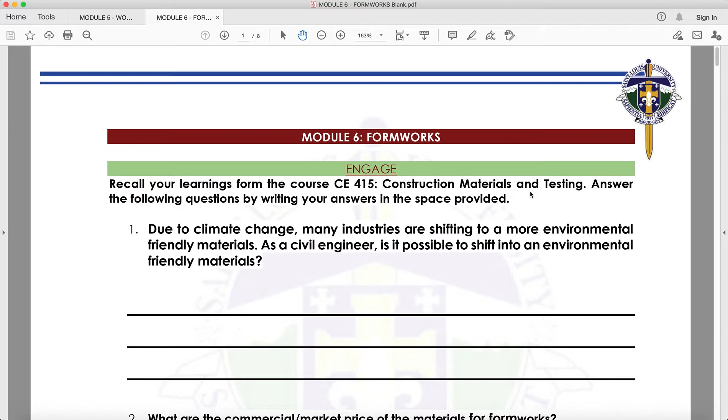So for this video, we're going to discuss Formworks, okay? But before we proceed further with this discussion, I strongly suggest that you review your learnings from construction materials and testing with regards to wood, okay? So that you can have a deeper appreciation for our topic.

Okay, so what is Formworks? Formworks is a temporary boarding or sheathing to provide the desired shape and size of concrete mass. So when we say fresh concrete, it is very workable, or it does not have any shape yet. So with the help of Formworks, we can attain the desired shape and dimension of our concrete when it's already cured.

So Formworks therefore is a form of false work. When we say false work, it is a temporary structure which helps the permanent structure. So ano ibig sabihin nun? Your structural members like your footing, column, beam, slab are permanent structures. And before we can have this permanent structure, it will first become fresh concrete. So in order to attain its shape and dimension, we need the help of formworks to hold them in place, and to mold the concrete while it is curing.

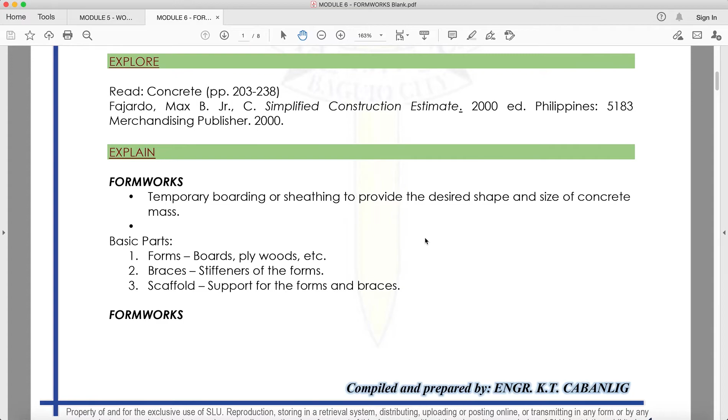So formworks is composed of the forms, braces, and scaffold. For the forms, we have the board, plywood, phenolic board. So ito yung board, this is the board, this one. It is the smooth surface that is being placed in front of the concrete face. So yan yung board.

Next would be the braces. Ito yan, horizontal, vertical, and we also have the diagonal braces. Though we don't have diagonal here, sometimes we use diagonal for braces. So what is the function of a brace? The function of the brace is to stiffen the board. Kasi kung board lang yan, if we do not have our bracing, then our formworks will explode. Puputok siya. Kasi hindi niya kayang i-counter yung force ng weight ng fresh concrete natin.

And next would be scaffolding. Scaffolding is to support the forms and braces. So this one is the scaffolding. It is the one that helps or supports our bracing.

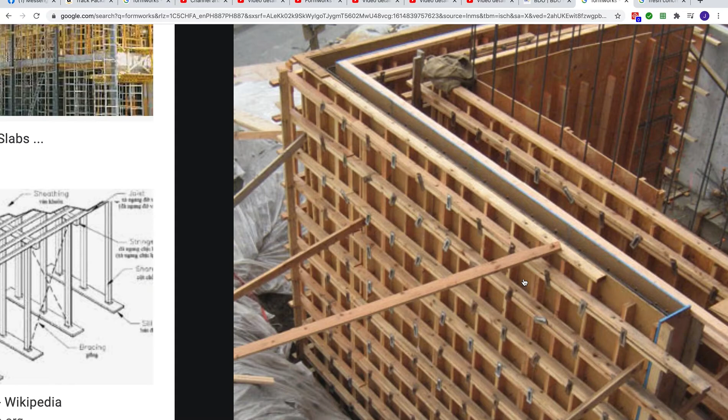So normally formworks are made of wood, the plywood, the lumber. But in modern practices, we are already using GI sheet and GI pipe in substitute for wood. Meron din tayong ginagamit na special type ng plastic to substitute our wood as formworks. One of the advantages of these materials is they are very much reusable compared to wood. But of course, in terms of pricing, mas mahal. But in terms of usage, mas matagal siyang magagamit, and it is for long-term usage. Other materials, gumagamit minsan ng fiberglass and so on. So that is formworks.

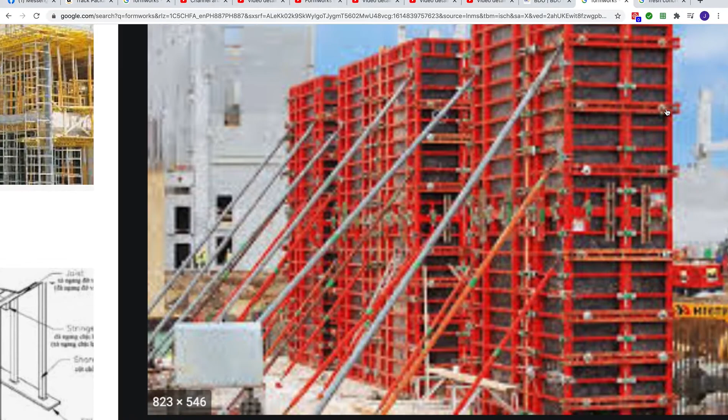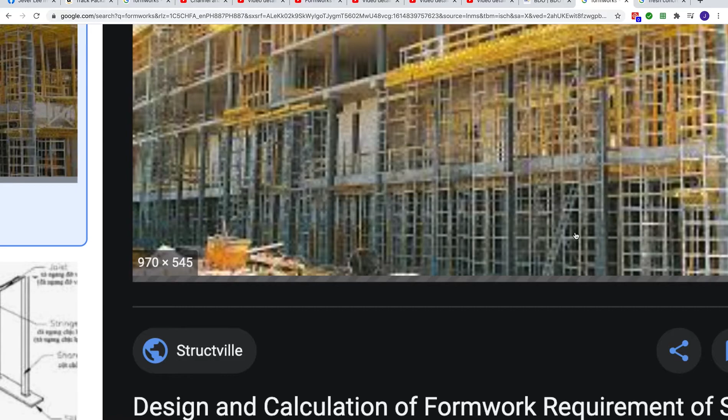So we have here other examples of formworks. You can see here, this one I think is phenolic board, but the bracing was made of GI pipe. Then these are your scaffolding. Likewise with this one, also your scaffolding.

For column, after 1 to 2 days of curing, pwede nang tanggalin yung ating forms. But for horizontal members, like the beam and the slab, we need at least 14 days or 2 weeks before natin tanggalin yung ating scaffolding or support, because it still cannot carry its own weight. We need at least 14 days of curing para mabuhat niya yung kanyang sariling weight. Unlike for column, 1 to 2 days of curing, pwede nang tanggalin. But you should not apply any load yet. So these are the examples of your scaffolding.

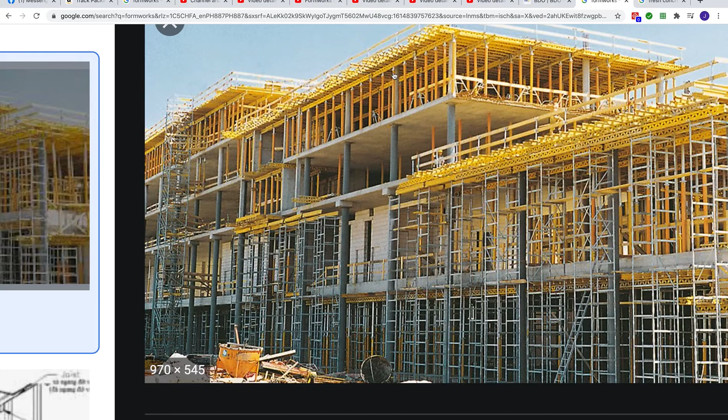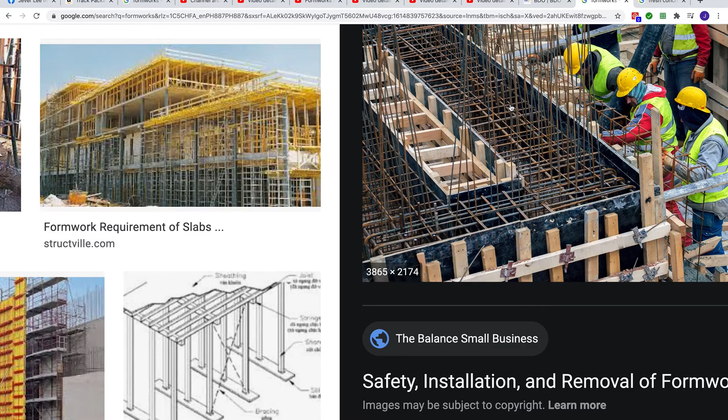So this one, you have here your formworks, formworks here, then formworks here, because the concrete is only on this part. So it helps us shape our concrete. Okay, so we can now proceed with our example.

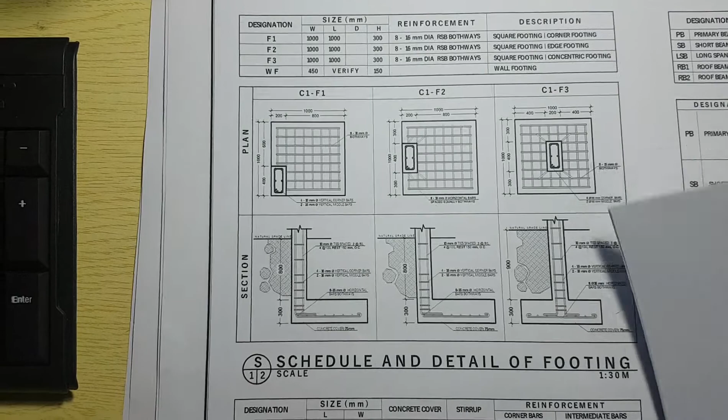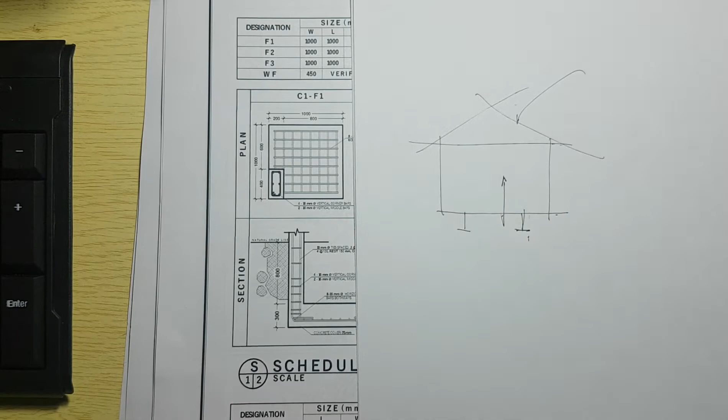In estimating, it is best if we start from bottom to top. When we design structures, what we do is design starting from the top, going down to the beam, to the column, to the footing. But when estimating, it is otherwise. We start from the bottom, then we go up. So for this one, we're going to start with footing.

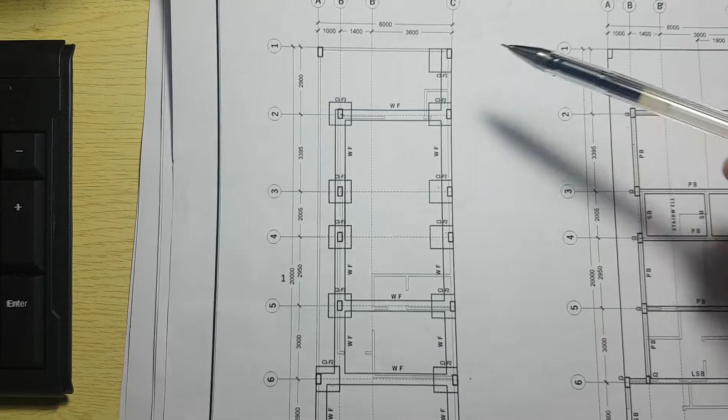So from the plan that I gave you, how many footings do we have? 1, 2, 3, up to 15. So we have 15 footing pads, all of which are 1 meter by 1 meter by 300. And the thickness of the footing pad is 300 mm. So it would look like this.

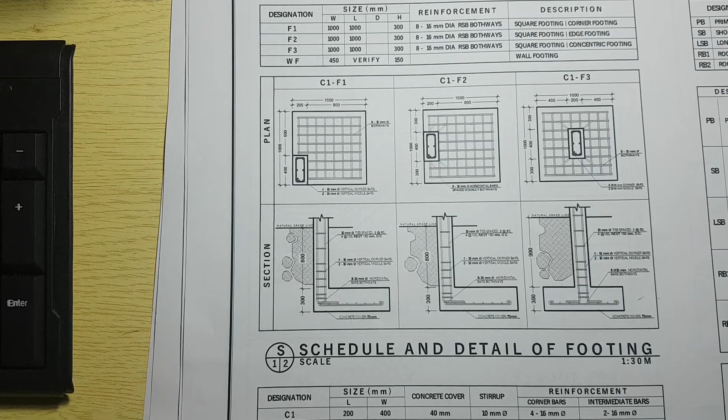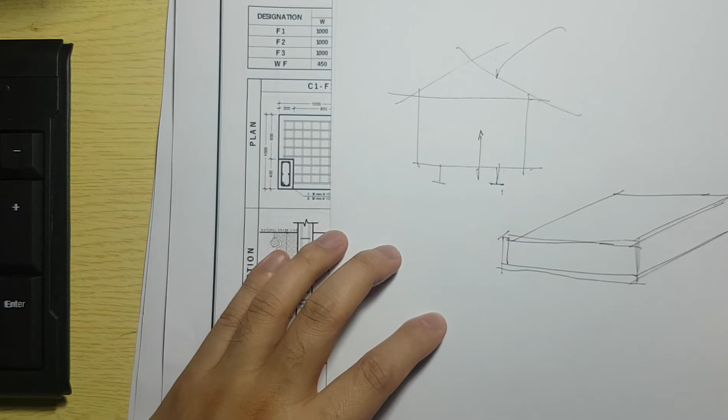So if this is my footing pad, ang mangyayari, lalagyan natin dito ng Formworks. So we are going to place Formworks here. It would look like this. We are going to enclose it, para siyang i-enclose in a box. So our footing would look like this one.

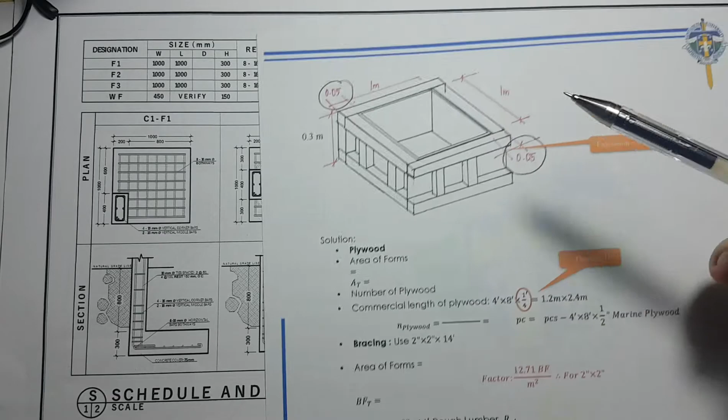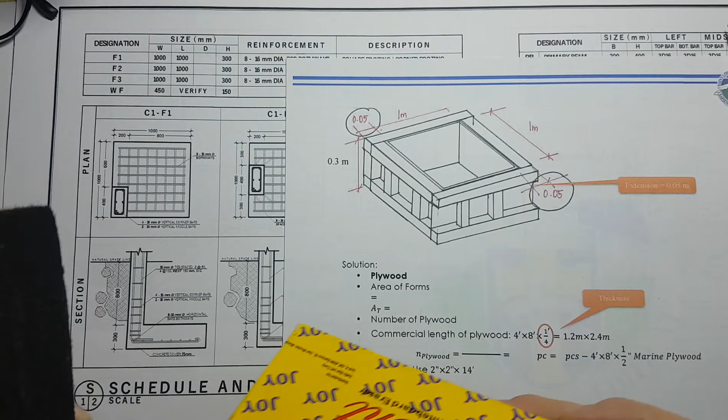Okay, so here we have, wait, let me just fix my... okay, so we have here the footing pad. So it is 1 meter by 1 meter, and it has a depth of 0.3 meters. So 0.3 meters, 1 meter by 1 meter. Now, what we need to estimate right now would be the formworks that would enclose our 1 by 1 by 0.3 meter footing pad. So, ang mangyayari niyan, dapat, it should not look like this.

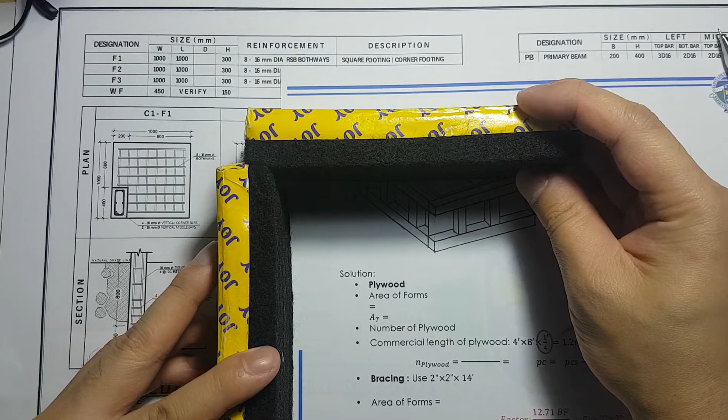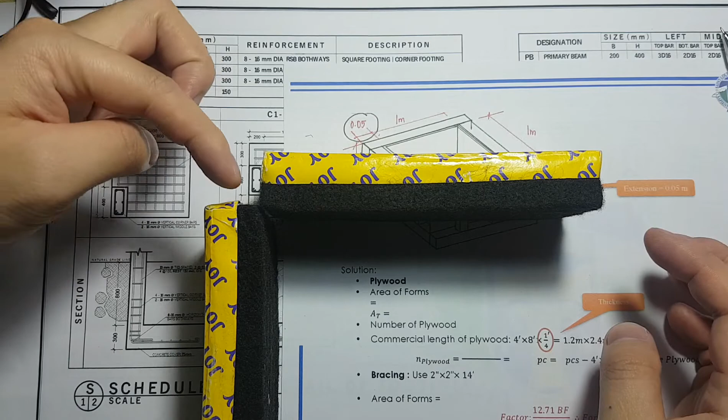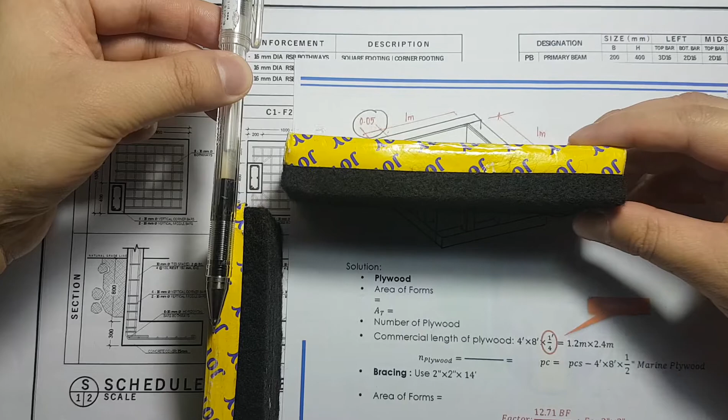Okay? This is the 1 meter, this is the 1 meter. So, what would happen is, one side would overlap the other. Because if we are going to enclose our footing by 1 by 1 only, wala tayong space, or we do not have anything na pagkakabitan natin. But if we are going to extend it, then we can nail our formworks here. Dito natin siya ikakabit. But if we are not going to extend, then there's no place where we can attach our formworks. Okay? So we are going to extend.

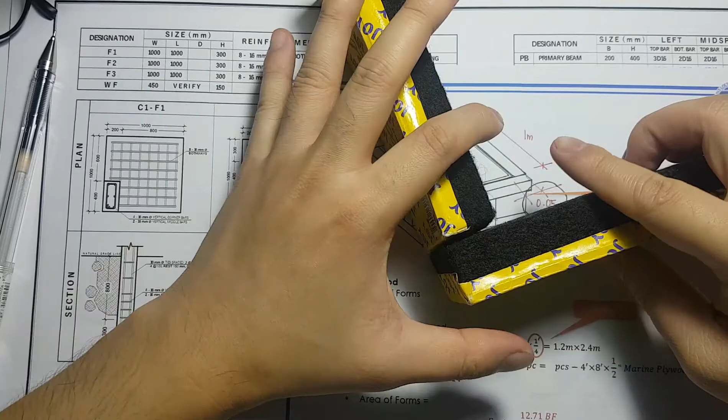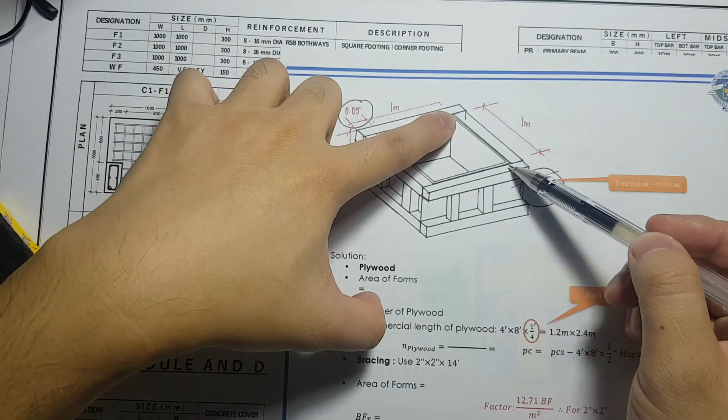So itsura niyan, this one yung nag-extend, itong nag-extend would be this one. Then yung nasa loob ng extension, ito is this one. Okay? So we have here our formworks. So the length or the area of our plywood would then become 1 meter by 0.3. So that would be 1 times 0.3 times 2 because we have two sides, diba? So there are two sides.

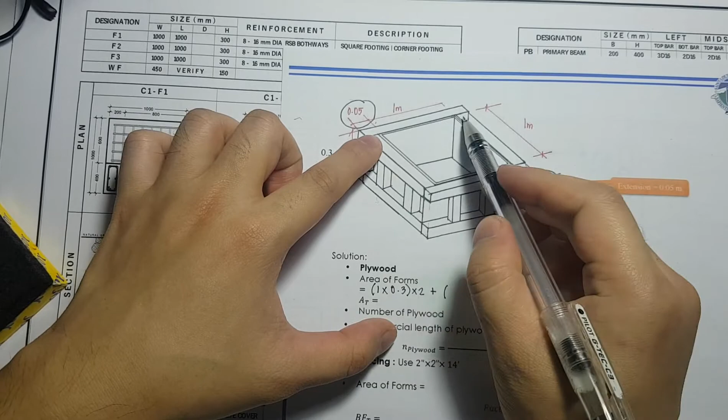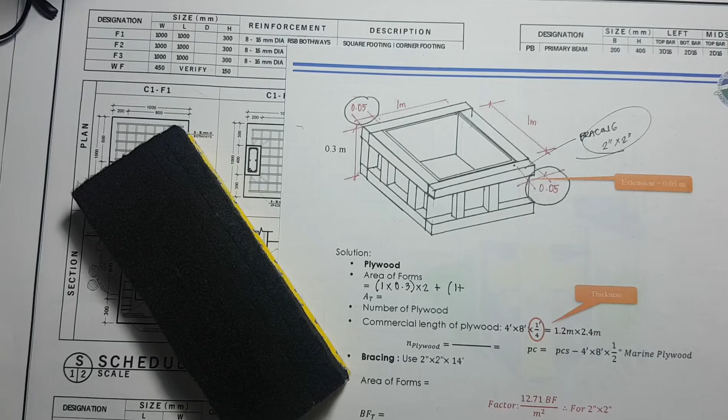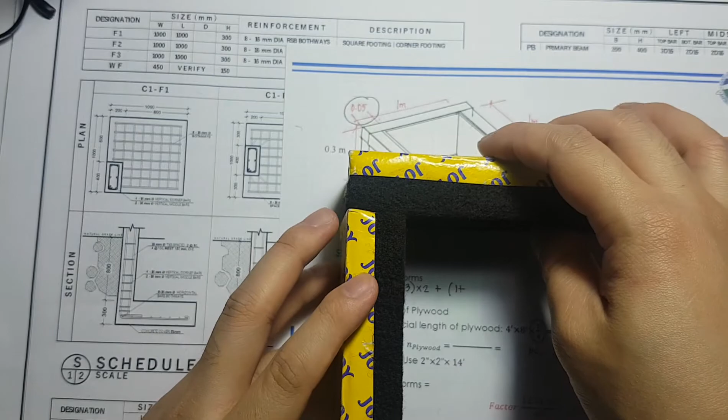Plus, this other one here, we have 1 plus an extension of, what would be the length of the extension? Take note, for bracing, what we normally use is a 2 by 2. So for bracing, we use 2" by 2" lang. This is the typical dimension that we use for bracing. So this dimension here is 2" and the dimension also here is 2". So if there would be an extension, it would only be 0.05. And on the other side, it would also be 0.05.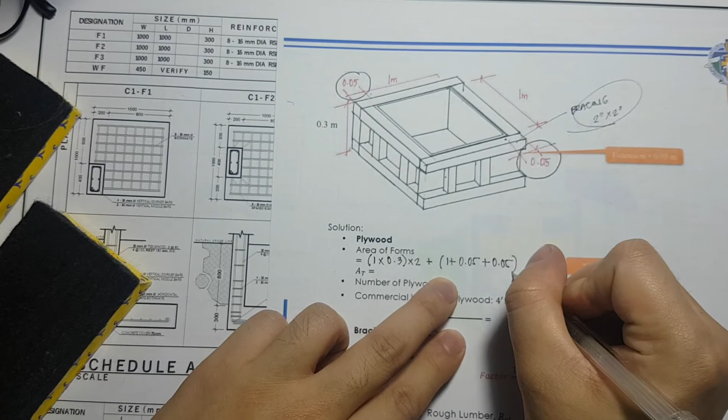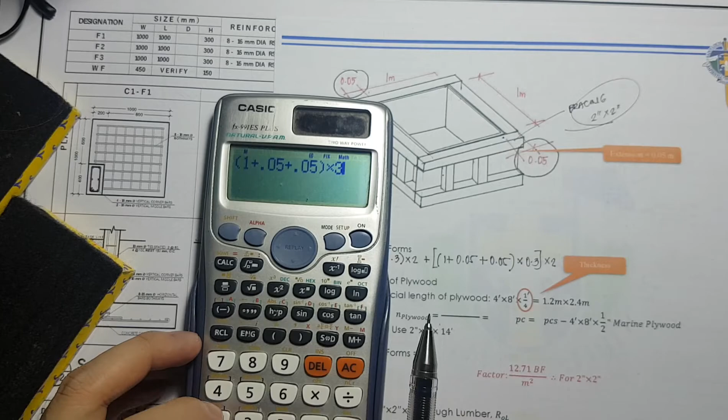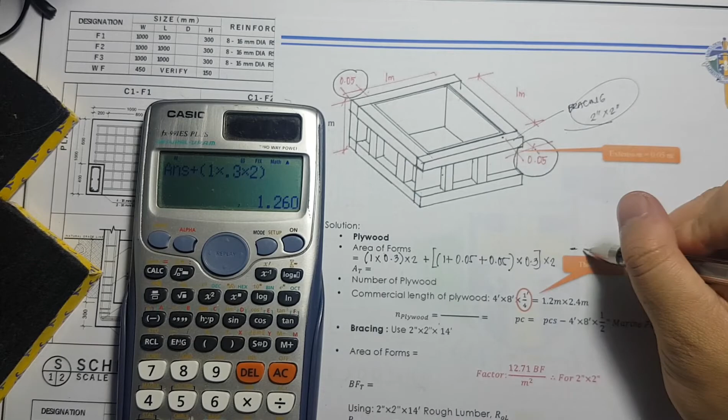So that is 1 plus 0.05 plus 0.05 times the depth, which is 0.3, and we have two sides. Therefore, the area of our plywood is equivalent to, unahin natin to, 1 plus 0.05 plus 0.05, times 0.3 times 2, plus 1 times 0.3 times 2. The area total is equivalent to 1.26 square meters. But the number of footing is equivalent to 15. Diba? We were able to count a while ago. 1, 2, 3, 4, 5, 6, 7, 8, 9, 10, 11, 12, 13, 14, 15.

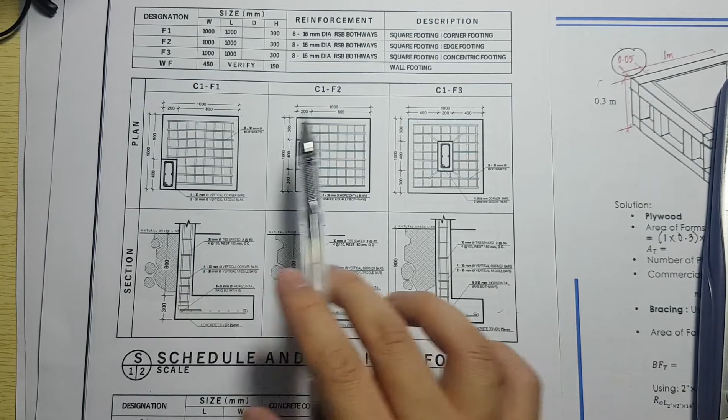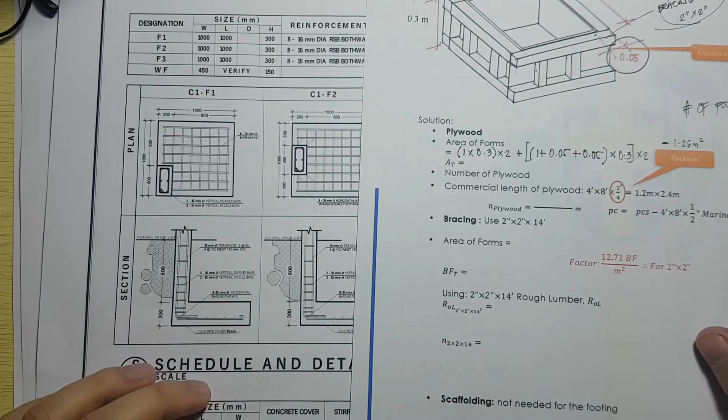And if we are to check our footing, we have here identical footing pad dimensions. So we have here F1, 1 by 1. F2, we have 1 by 1. And F3, we have 1 by 1. And the depth or thickness of the footing pad of all of these footings is 0.3. So we can go right away. But if, for example, the depth of F1 is 0.4, then we're only going to consider F2 and F3 for this computation because the depth we considered here is 0.3. Another solution for 0.4. Okay, so the number of footing is equivalent to 15 pieces.

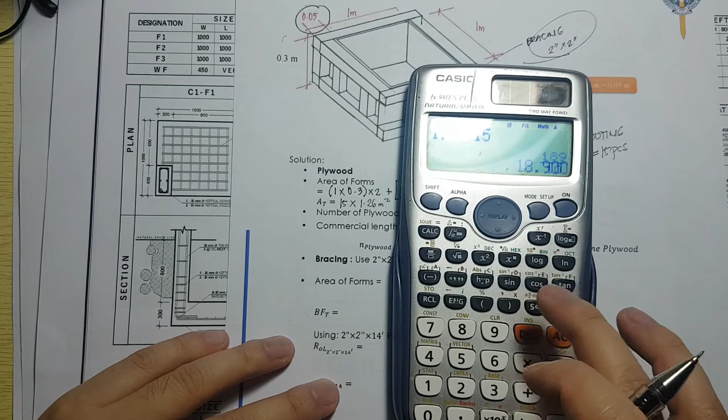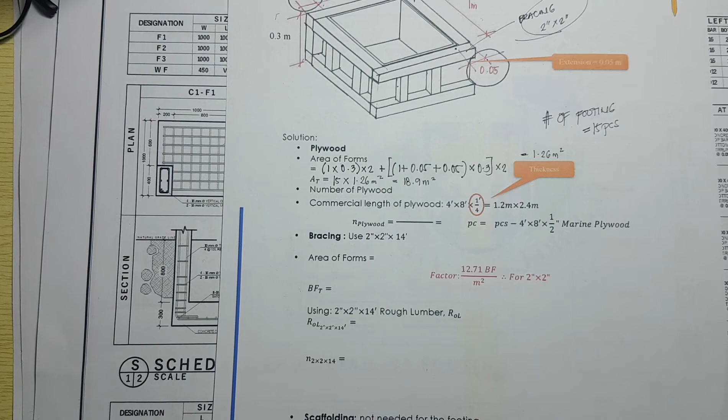Therefore, the area total is equivalent to 15 times 1.26 square meters. That is equivalent to 18.9 square meters. Okay, so after getting the area, we can now solve for the number of plywood. So like what we have used for our woodworks, the commercial size of a plywood is 1.2 meter by 2.4 in SI, and in English it is 4 feet by 8 feet.

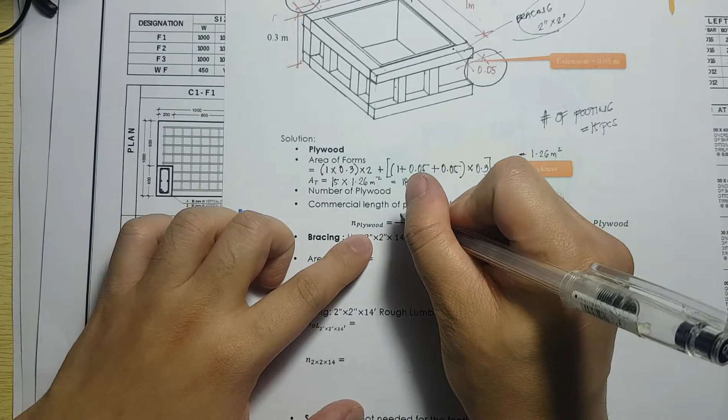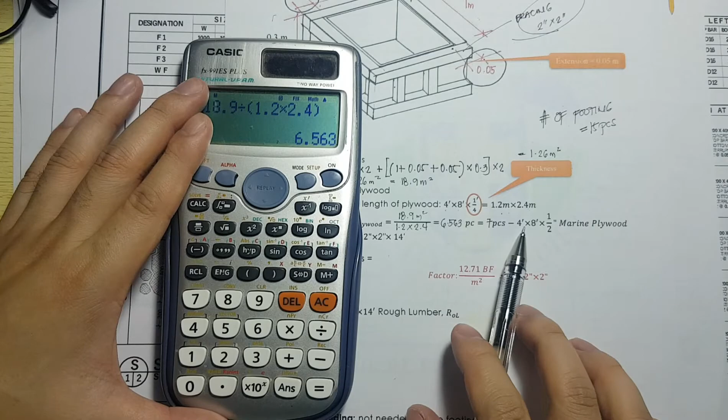So the number of plywood is equivalent to the total area, which is 18.9 square meters, divided by 1.2 times 2.4, divided by 1. That is equivalent to 6.563, and that is equivalent to 7 pieces of 4 by 8 by 1/2 marine plywood.

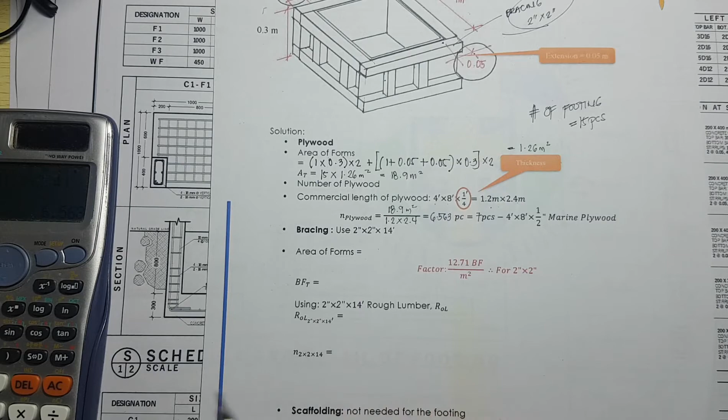Okay, now for the bracing, like what I told you, the dimension we use is 2 by 2. For this one, the available commercial length is 14 feet. So how many 14 feet are we going to use? In this one, we are using the area method, like what we have discussed in woodworks. Now, the factor that we are going to use here in our formworks for a 2 by 2 is 12.71.

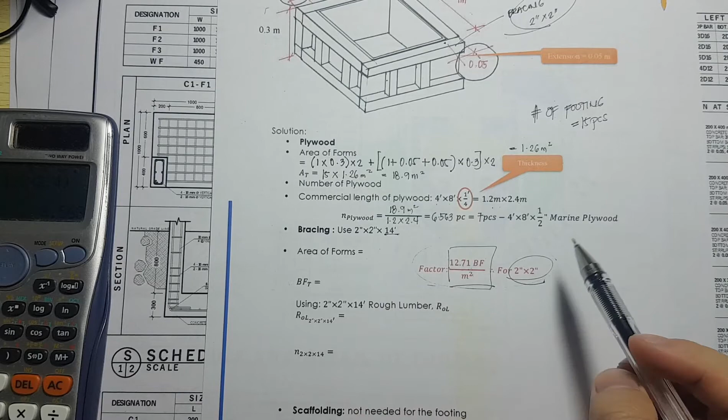This 12.71 board foot per square meter here was derived using 2 by 2, regardless of the commercial length. I repeat, the 12.71 board foot per square meter was derived using a 2 by 2 lumber.

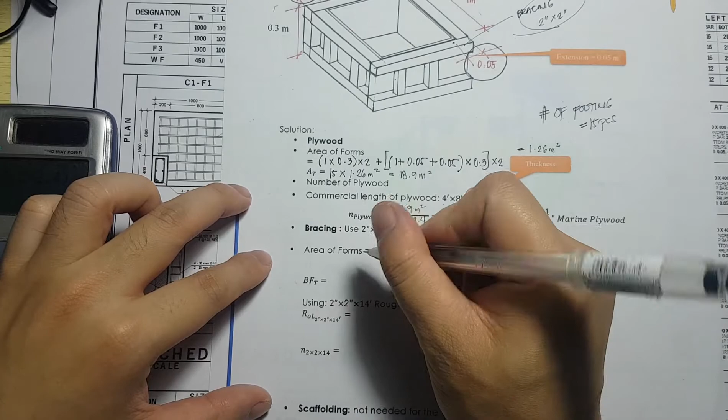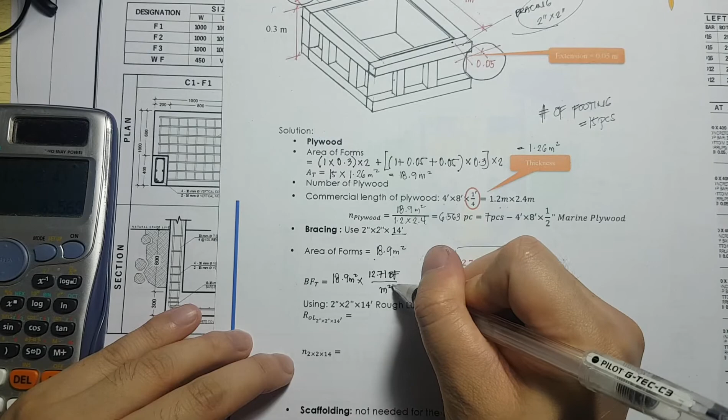Okay, so the area of the forms is 18.9 square meters. How many board foot are we going to use for 18.9 square meters? So we have 18.9 square meters times our factor of 12.71 board foot per square meter. Square meter will simply cancel out and we are left with our unit of board foot.

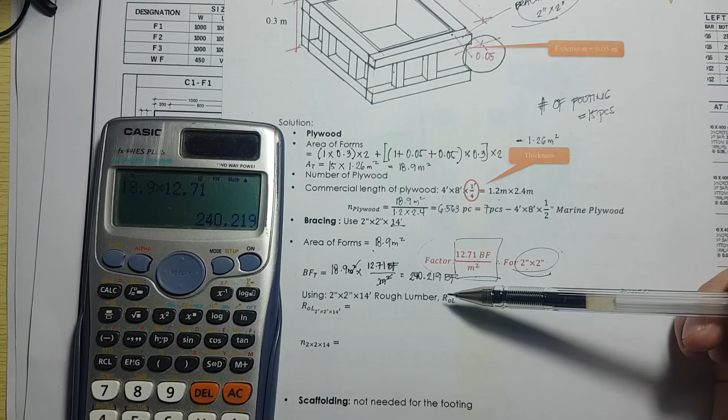So 18.9 times 12.71 is equivalent to 240.219 board foot. Now we are using 2 by 2 by 14 rough lumber. ROL stands for rough lumber. So what would be the factor of rough lumber so that we can divide 240 by it to get the number of pieces of 2 by 2 by 14?

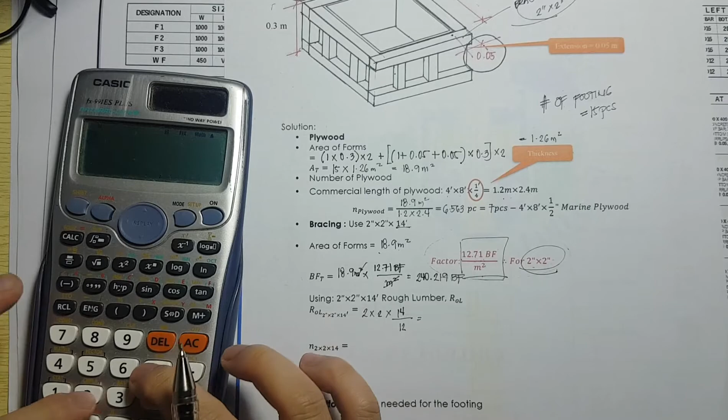So for the factor, it is 2 times 2 times 14 divided by 12, and that is equivalent to 4.667 board foot per piece. So to get the number of 2 by 2 by 14, we take 240.219 board foot times 4.667 board foot per piece.

No, wait. It should be divide. It's not multiplication, it is division, by unit analysis. So we have 4.667 board foot per piece, and board foot will cancel out. Therefore, the number of 2 by 2 by 14 is 240.219 divided by 4.667. That is equivalent to 51.472 pieces of 2" by 2" by 14 feet rough lumber.

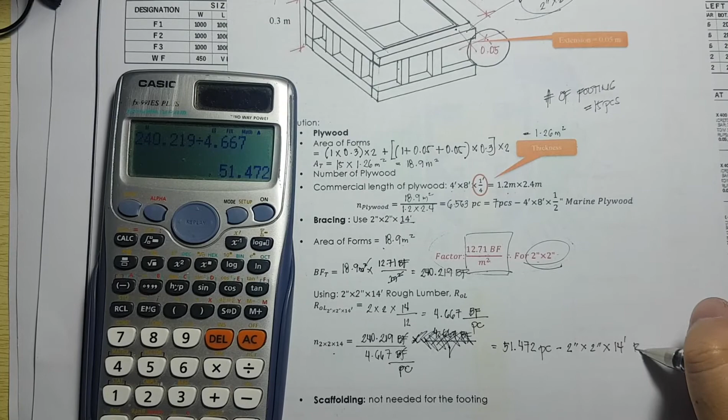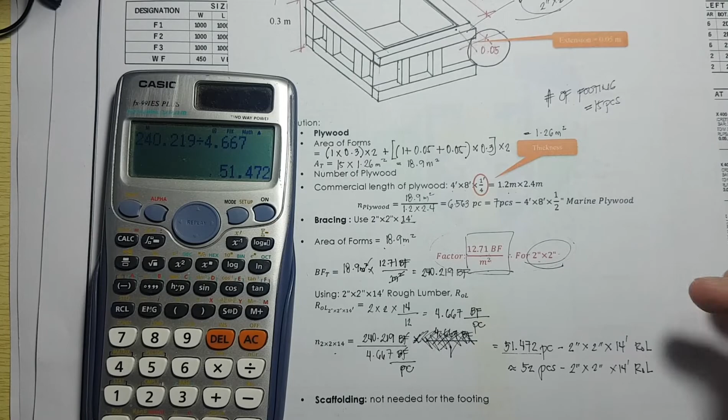But do we have 51.472? No. So we round it up to 52 pieces of 2" by 2" by 14 feet rough lumber. Are we done? No, we're not yet done. We need to get the board foot because in the market we pay by it, and the unit for wood is board foot. So how are we going to do that?

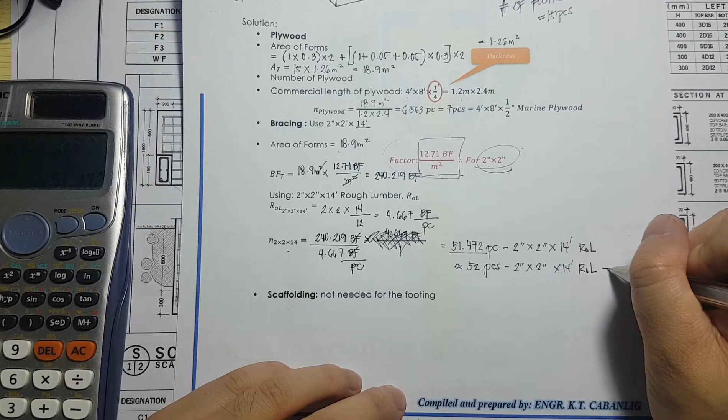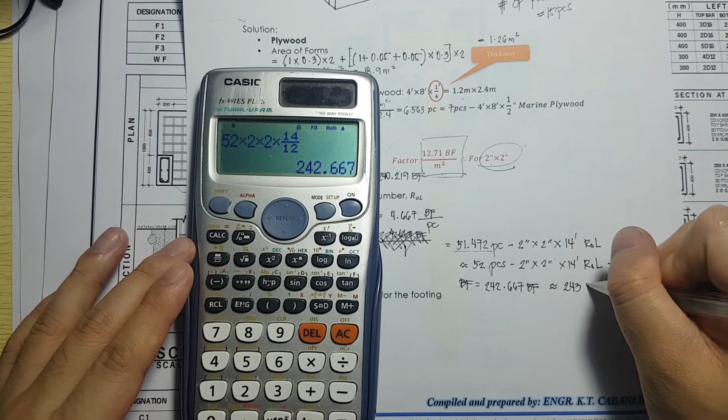So the board foot is 52 times 2 times 2 times 14 divided by 12. That is equivalent to 242.667 board foot. We have a decimal, so we round it up to a whole number, 243 board foot. So the final answer would be 52 pieces of 2" by 2" by 14 feet rough lumber of 243 board foot.

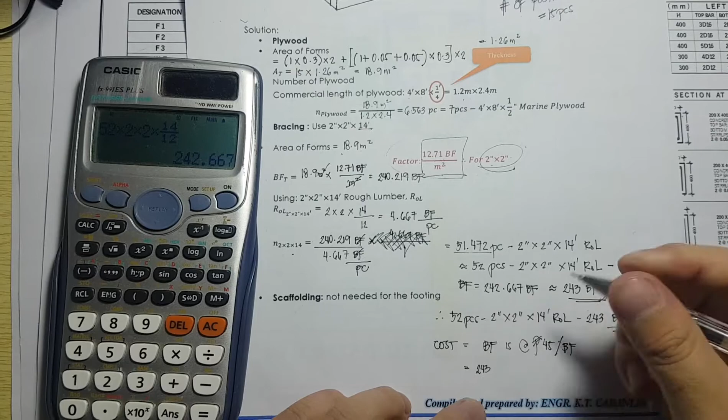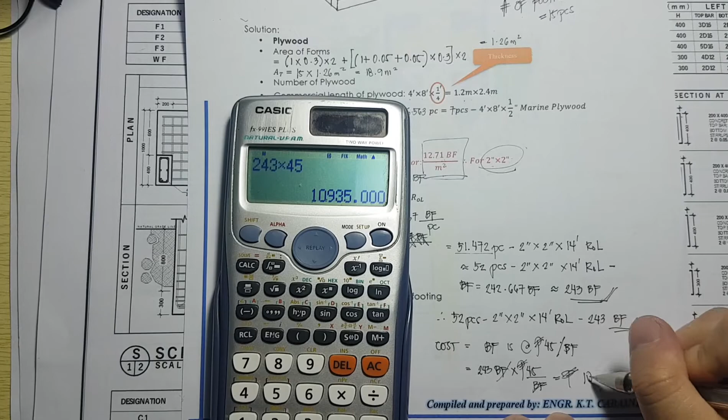Now for the costing, let's say the board foot is at 45 pesos per board foot. The cost would be 243 board foot times 45 pesos per board foot. Board foot will cancel out. So 243 times 45 is equivalent to 10,935 pesos. This would be the cost to buy these 52 pieces. We will not use the decimal; what we're going to use is the whole number.

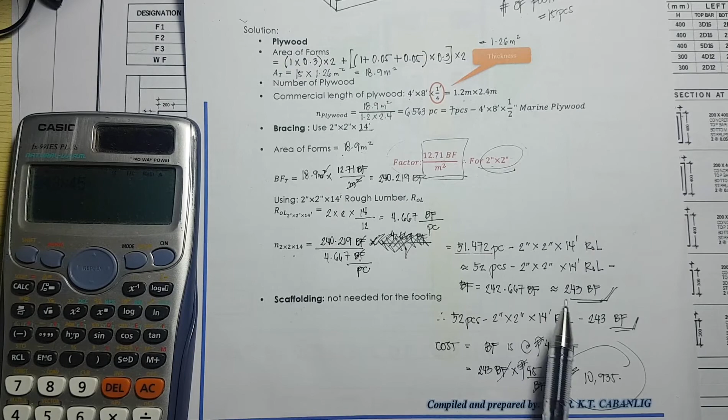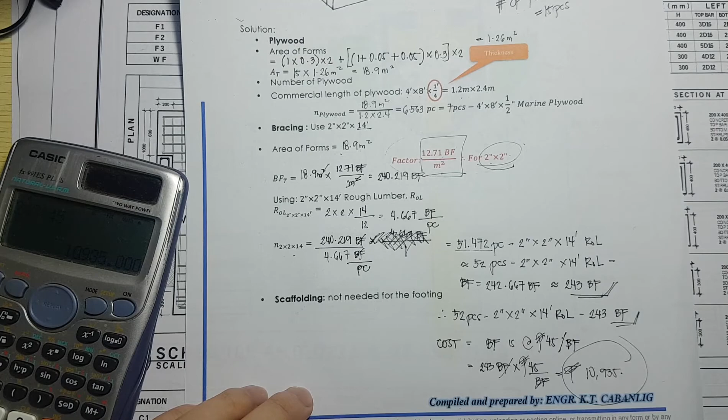Now for scaffolding, for footing, we don't use scaffolding. Normally, if it is a ground level footing, before backfilling. If there is excavation, that's the time we don't use the scaffolding. For ground level footing that gets covered and then has an embankment, we have scaffolding only here. And that's very minimal. You can do that on site.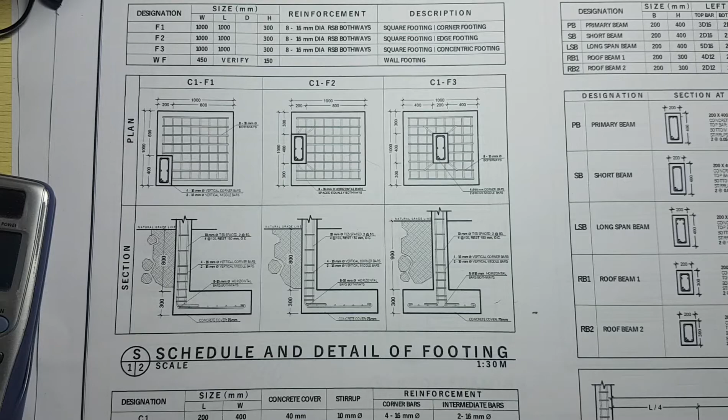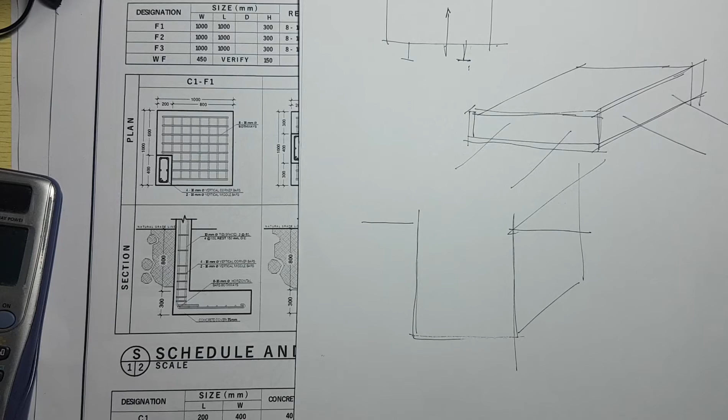Someone may ask, sir, why do some on site, if this is the excavation, not use formworks? That would happen if the soil is very much intact. If the soil is quite sandy or it erodes, our excavation would look like this. And if that happens, then we place formworks here.

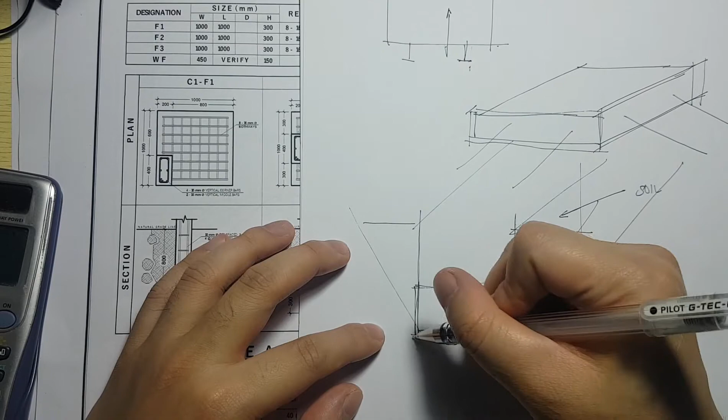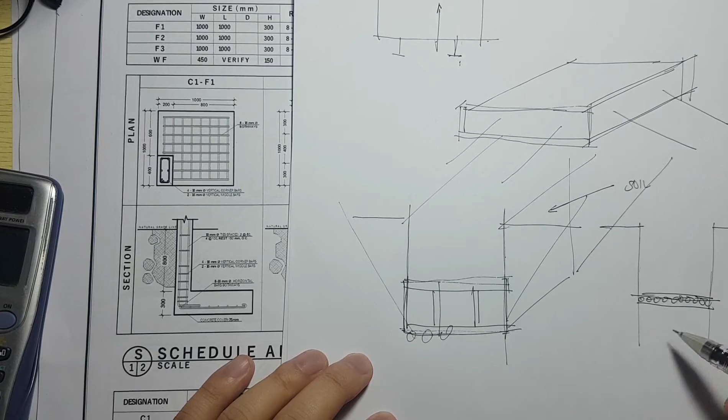But if the excavation is like this, some practice this because the soil is very much intact: they just place gravel bedding here. By the way, this also has gravel bedding. Then the dimension of the excavation is the same as the dimension of the footing, 1 meter by 1 meter. So it's direct concrete pouring. That's what happens.

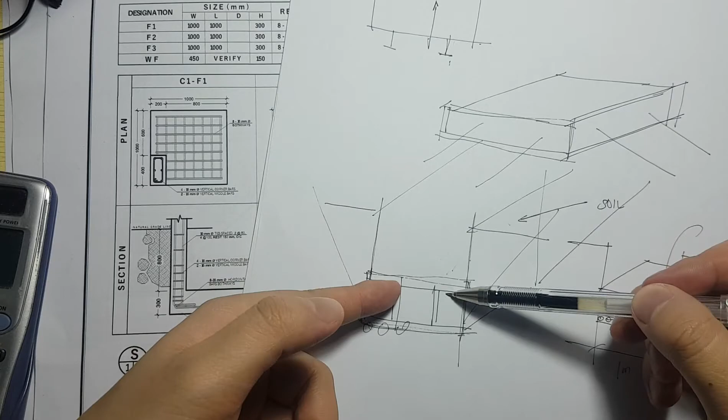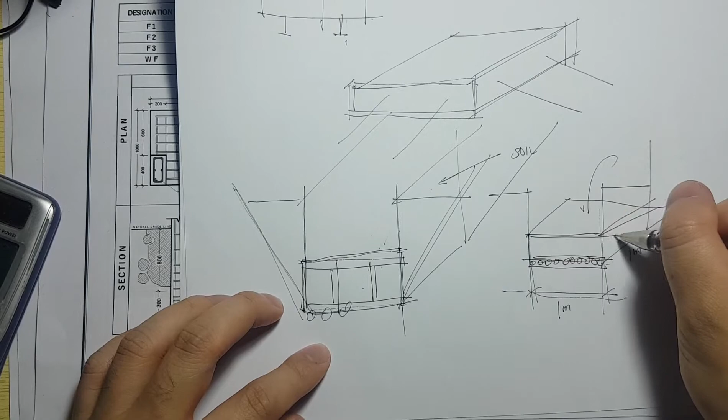But if the soil is not very stable, where it erodes and enters our concrete, that's the time we do excavation with slope, then we place formworks. Here, no formworks are placed. And imagine, if the size of your footing and the size of your excavation is the same, how are you going to remove your formworks? So some, in practice, don't place formworks here. But it is safe to include the formworks for the footing in our estimation.